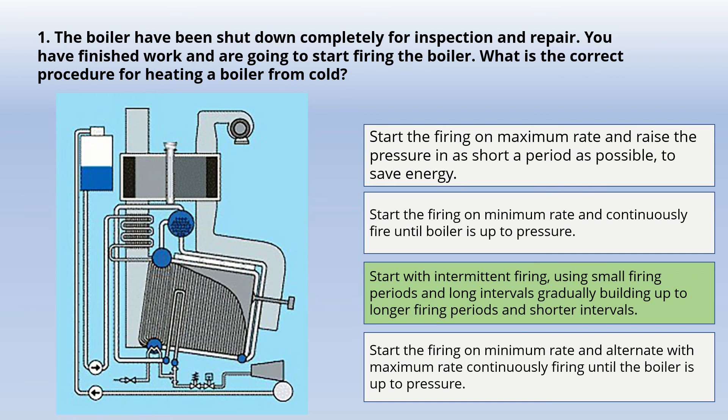What separating temperature do you think is best for lubricating oil? 85 to 90 degrees centigrade.

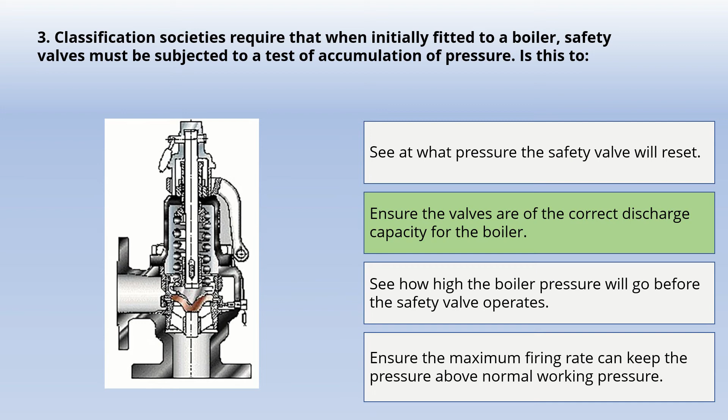Classification societies require that when initially fitted to a boiler, safety valves must be subjected to a test of accumulation of pressure. Is this to ensure the valves are of the correct discharge capacity for the boiler?

What is the meaning of the term clarification? Separation of solid contaminants from a liquid.

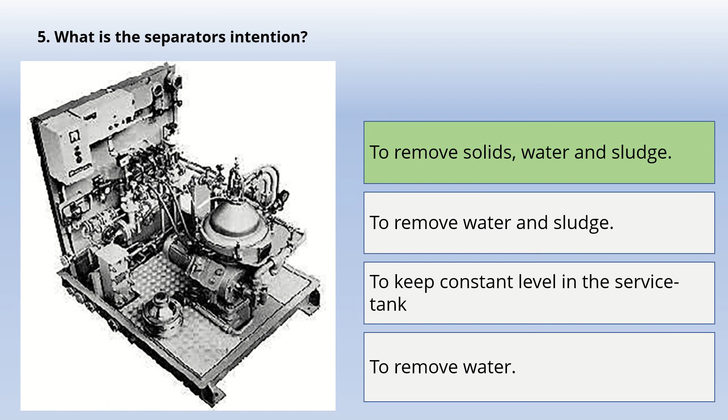What is the separator's intention? To remove solids, water and sludge.

How do you want to operate the purifier to obtain the best separation result? Separation with correct temperature and low flow rate.

Which items are important to get an optimal separation? Correct flow, pressure and temperature.

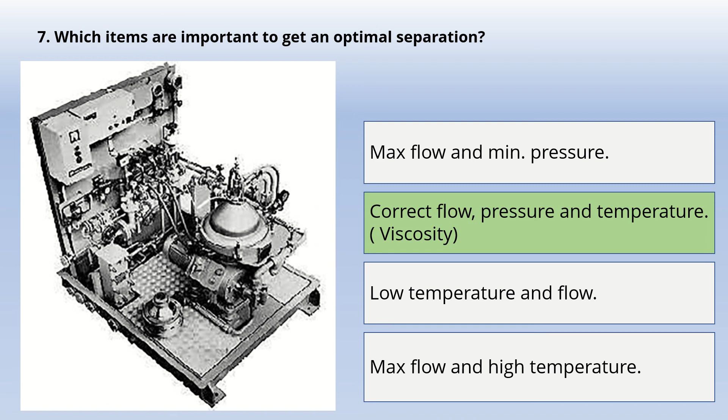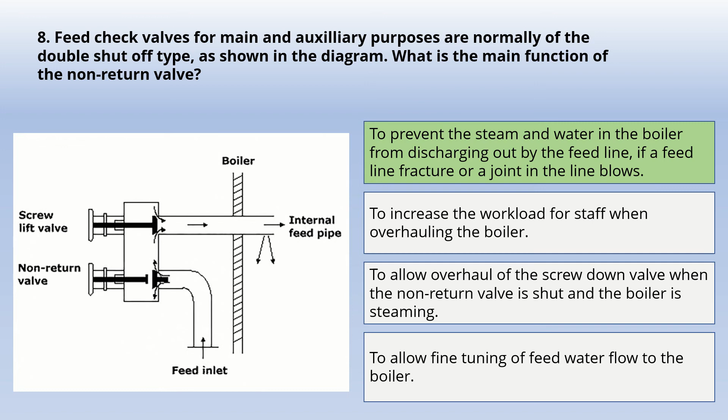Feed check valves for main and auxiliary purpose are normally of the double shut-off type as shown in the diagram. What is the main function of the non-return valves? To prevent the steam and water in the boiler from discharging out by the feed line if a feed line fracture or a joint in the line blows.

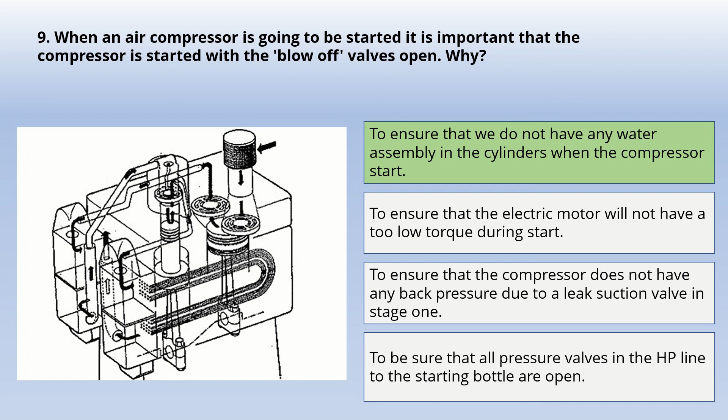When an air compressor is going to be started, it is important that the compressor is started with the blow-off valves open. Why? To ensure that we do not have any water assembly in the cylinders when the compressor starts.

After complete shutdown of the steam plant, the boiler has been heated in accordance to correct starting up procedure and is now firing at working pressure. You are going to open the main steam valve to the system. What will be the correct procedure for this operation?

Open steam valve very slowly considering system expansion.